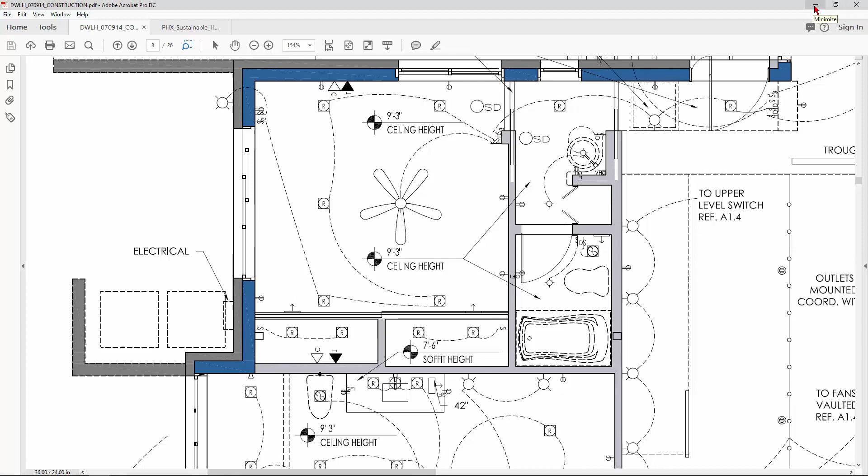Okay, so that's what we're going to do. We'll also go over power and communication a little bit later.

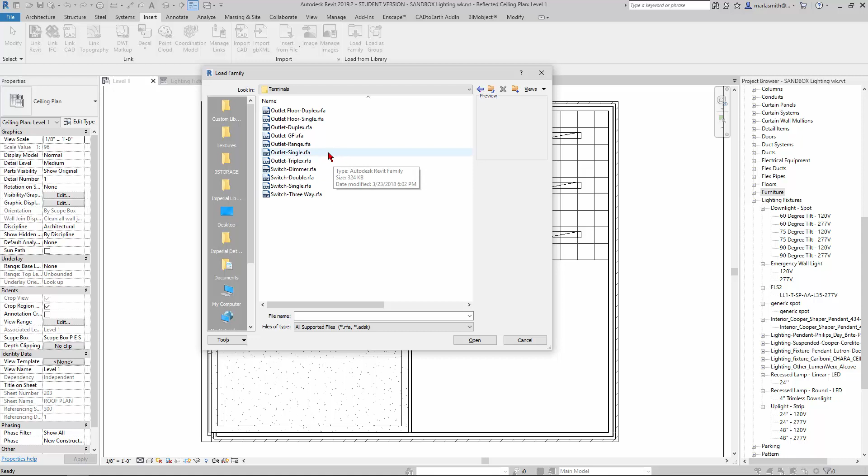So what I wanted to show you was where they are in the families. If you go to Insert and Load Family and look for them, you would go to your U.S. Imperial Library. There's an electrical, architectural, electrical power, and terminals. You can come in, and I'm going to get the three-way, the single, and the dimmer, and click open, right?

And that guy's going to come in, and if you go under your electrical fixtures and expand those, you'll see those, right? Alright, so there they are.

And what I want to do is just put a single pole here. Maybe we'll flip the door and put it on the other side, put it over here, and connect these guys to it. So just do a series of lines and then connect it to the switch.

So if I go into my switch single and expand this guy and pick it and drag it out, I can place it on this wall. It's wall based, which makes sense. And I left click, right?

And you'll notice that the elevation is set to 3'9". That's typical elevation for a switch. You know, if you want to measure them, you can, or look at your literature from your readings. The problem with that is that we're cutting at 6'8" and looking up, so that switch is not visible.

So if I edit the range and go 4 feet and hit apply, you'll see that switch show up. But that's really the same level as a floor plan cut, which is a little strange. You'll begin to get windows and all sorts of things in there. So I'm going to go with 6'8" again and hit apply.

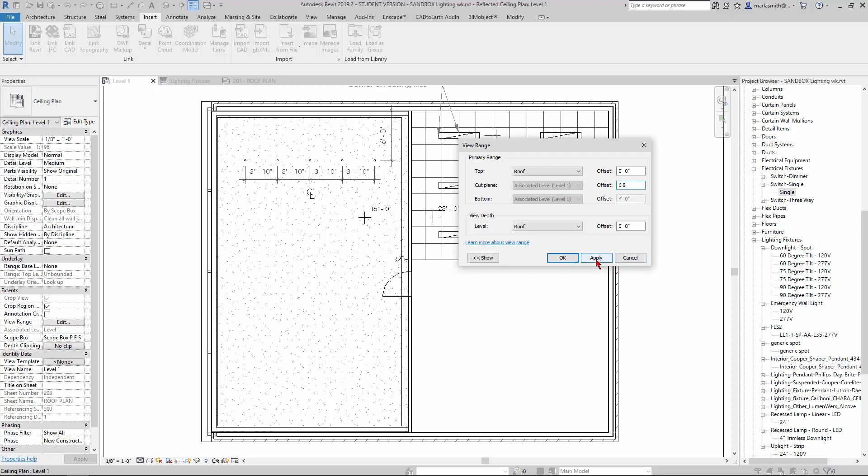Okay. Now what I've done is I've created some of my own switches that will show up. It's a little odd that these won't. I'm not sure how they would typically tell you to get around that, but the way that I've gotten around it is I'm going to go to my Insert Load Family, and I gave you these

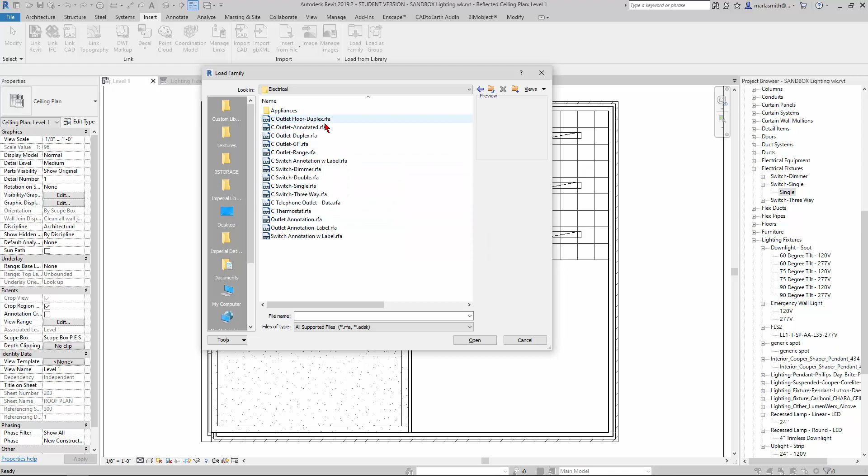for your own use in the zip file. I'm going to go to Custom Library, then Electrical, and you'll see that I have basically the same things, many of the same things, but with a C in front of them. So if I come in and pick, let's go to switch three-way, switch single, switch dimmer, right? And then I'll do switch annotation with label, okay? And I'll click open, and you'll see those guys come in.

So you'll see all my C switch, right there. Okay, and so let's go ahead and put in the single pole. So there's my single, and if I drag that out, you can see that it's visible.

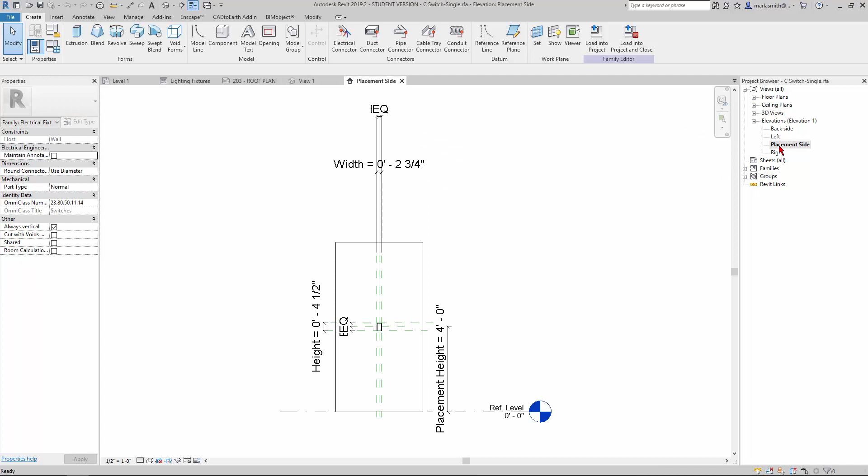What I did was, and let's take a look at this family real quick. You don't have to do this, but basically if I come to the placement side, right, here's that switch. So it goes to 4 feet, but what I did was I put a symbolic line in that's really tall, and the thing you have to make sure is that it doesn't go into the next floor above, so I really should give that a distance right here.

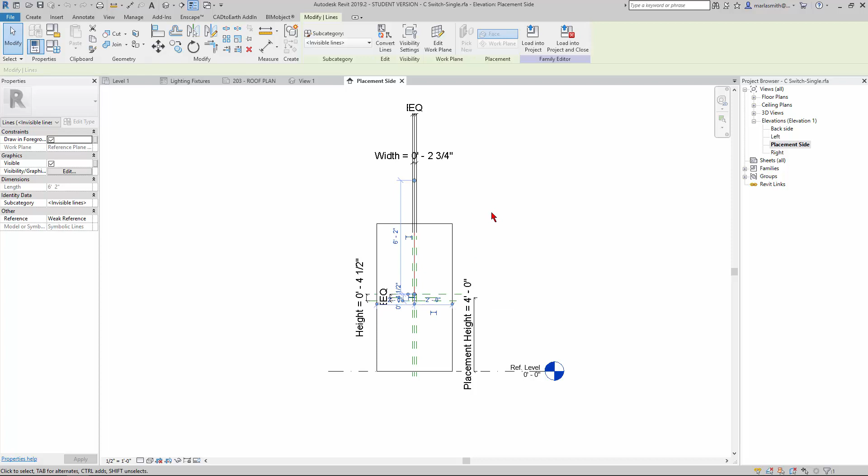But I just made it tall, so when it gets cut, it cuts that line and it tells Revit to show that guy. Okay, all right, so not that you would totally understand that, but I wanted to give you an idea of what was going on.

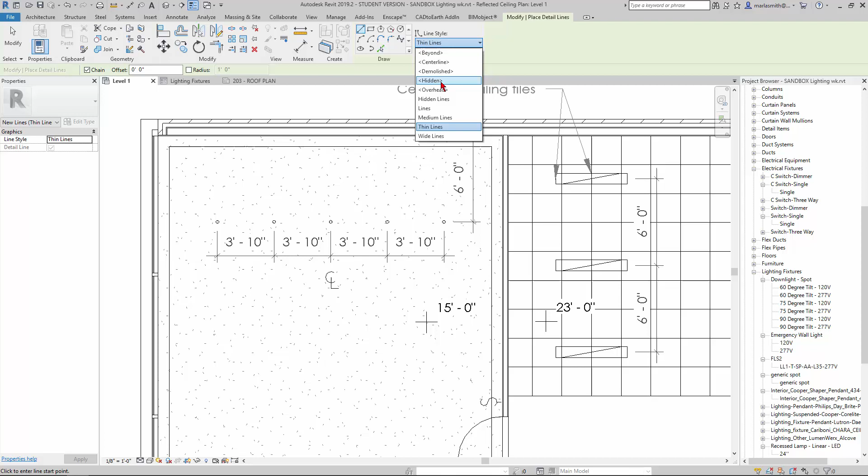So there's that switch. And then what I want to do, and this is this sort of low analog part of it as well, is I just want to go into annotate. I want to go to detail line. I want to come in here and I'm going to pick my hidden lines or overhead. It really depends on what you want. And then I'm just going to pick arc, and I'm going to come in and go from here to here, right? And just draw an arc there.

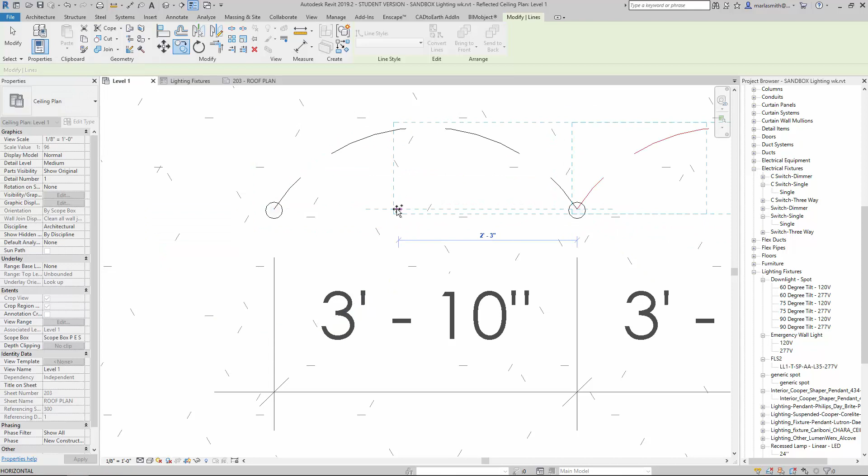And then I'll just pick this, and because they're the same, I'm just going to copy them using multiple and pick the same point, right? And connect. So basically I'm just connecting these guys together.

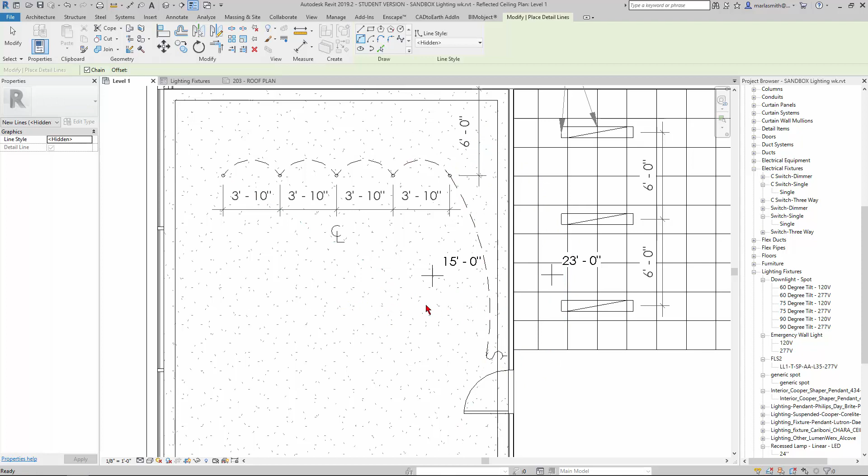And then I'll go back and go to my annotate detail line again. Still set on hidden, and I'm just going to pick here, whoops, I want an arc typically to differentiate it from any other straight lines. So I could come over here and just kind of arc that like to there, right? And that's how you tell it how to switch.

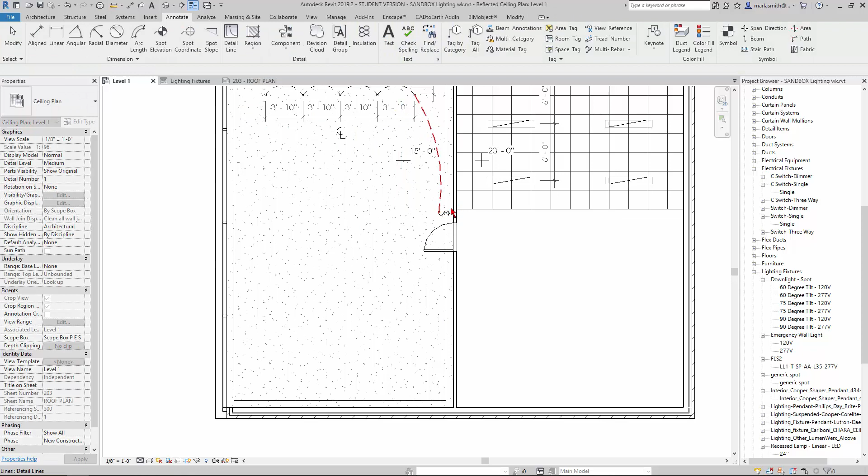Now if I had it being switched in two different places, right, I could flip this out for the C switch three-way, and it would have a little 3 embedded in it, and I can copy this guy. Actually, let's just create similar and maybe bring it over to another wall if I wanted it to be switched

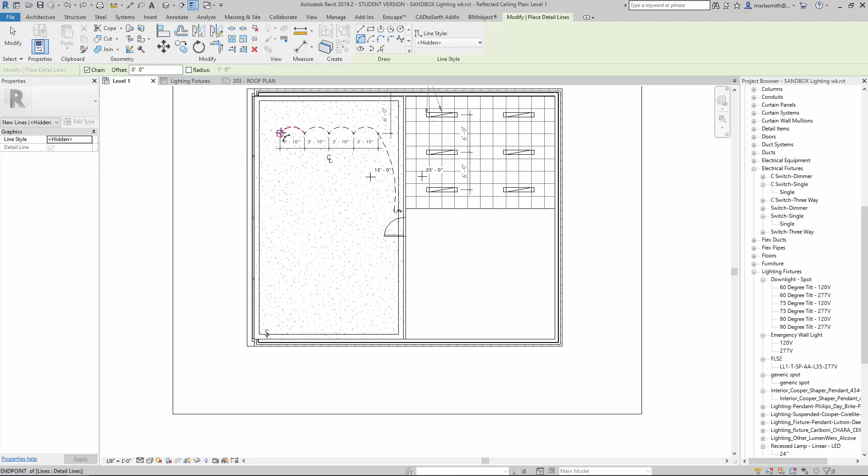over here. And then I would just do the same thing, go to annotate detail line, and then, whoops, always forget to make it an arc, right, and sort of from there to there to there. Okay, so that's putting in switches, and we'll talk about power when I come back.